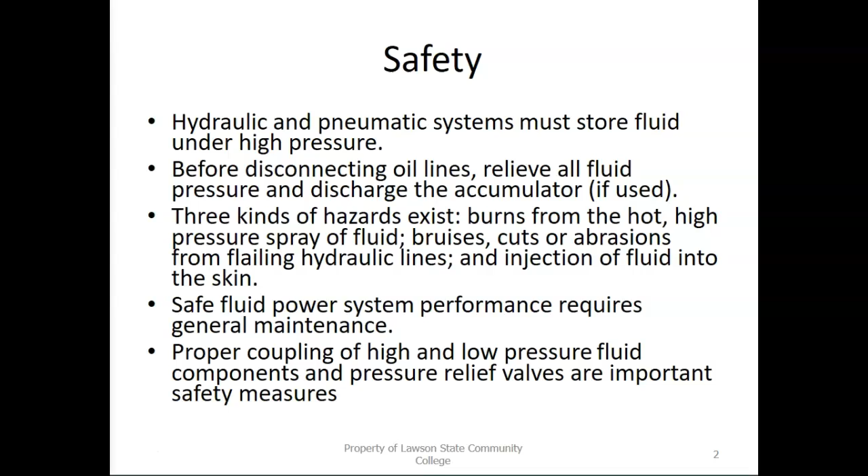So periodically check for leaks and worn hoses. Don't ever do it with your hands and your fingers, because that's asking for trouble. That's going to get you bit by something, right? Think about that for a minute. Yes, you should check for fluid leaks and worn hoses, but you want to make sure you do it properly, and many places have a specific way they wish you would check it.

If it's pneumatic lines, what's the best way to check it? Can't see air, but you can hear it. Soapy water, exactly. Something very simple, it's soapy water. It's the way you check for leaks on a tire, y'all know that, right? If you're ever looking for a leaky tire, you've got a little puncture in your tire, spray soapy water on it, what's it do? It's gonna blow bubbles.

Keep contaminants from hydraulic oil and replace filters periodically. That's what you're supposed to do within your car, right? So why would you treat a pneumatic system at work any different than you do your car? Every X amount of miles or X amount of months, you need to change your filters, because otherwise everything gets gunked up, breaks down, and just...

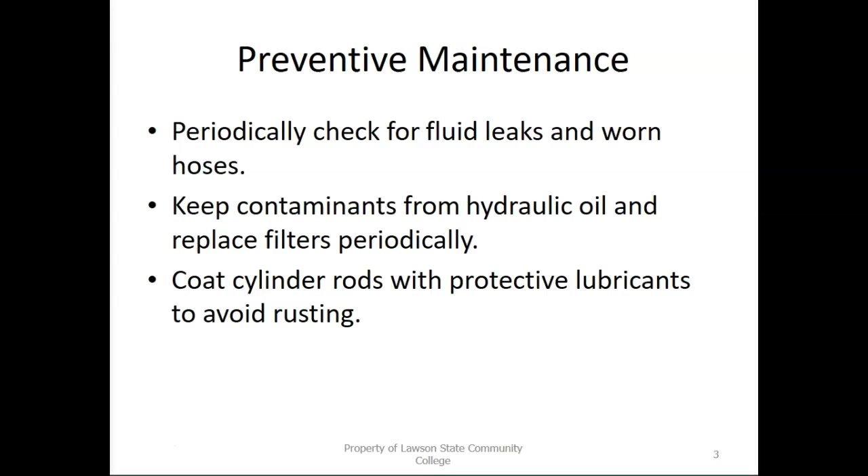So that's why you need to make sure you cut off all lines and depressurize your system before you work on it. Because if you don't, it can mess you up. It can cause a lot of problems.

So fluid power: this is the use of a confined fluid flowing under pressure to transmit power from one place to another. It has no fixed shape and yields easily to external pressure. Liquid and gas are primarily used in industry. Now, when it talks about gas, what is the most common one we use as far as gases go? Do we use specialty or just basic air? We use basic air. Why? Because it's cheap. All you gotta do is have the compressor suck it in, press it down, send it on. And then at the end of the day, what can you do with the rest of that air? We can re-release it into the wild from whence it came, only it's generally cleaner than whenever it went in.

So the main advantage of fluid power over electricity is that actuators can be stalled without damage. If you do that with electricity, you are probably going to burn something up, tear up your motors, something. The actuators can be linear or rotary, but the speed is very simple to control because all you got to do is control the pressure and the speed at which fluid flows into that cylinder.

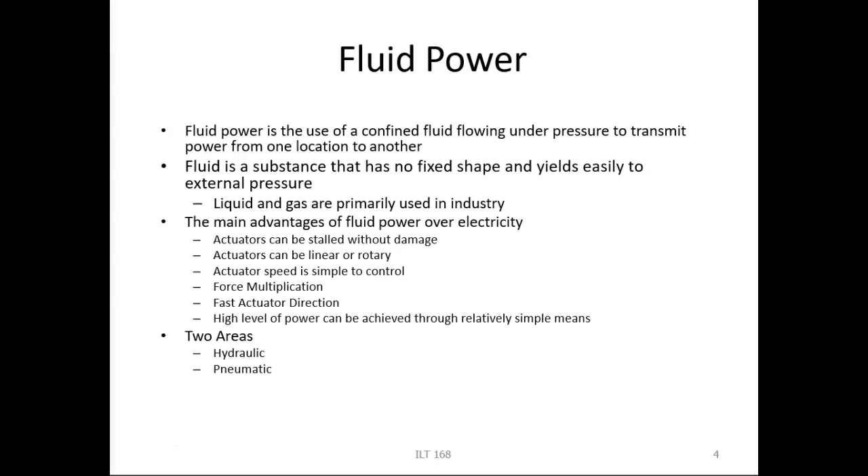So it's easier to produce straight line motions with fluid power. It really is. It can transmit equivalent power to a much smaller space. It's safer. Why is it safer?

This is one of those times I wish I had my home drill, because I've got a nice little power drill, and if you've ever really looked at the motor as you spin that sucker, what does it do? Not just spins, it sparks. Bad thing about electricity is it can throw some sparks out. Why is that unsafe? Well, if you're in a flammable or explosive environment, it may only take a little bit of spark to set it off, that's not something you want to use around that. Or if you're working around fluids that are flammable, not such a good thing to work around.

But it has to do with the motor and the friction of the motor. A lot of motors have what are called brushes inside them. So when they spin, those brushes create the electricity, but they can also create sparks and arcs. That's part of the problem with electricity—when you spin motors and have a little bit too much friction, you can have problems. The other reason is that electricity gets really hot. It can overheat. It's got plenty of problems.

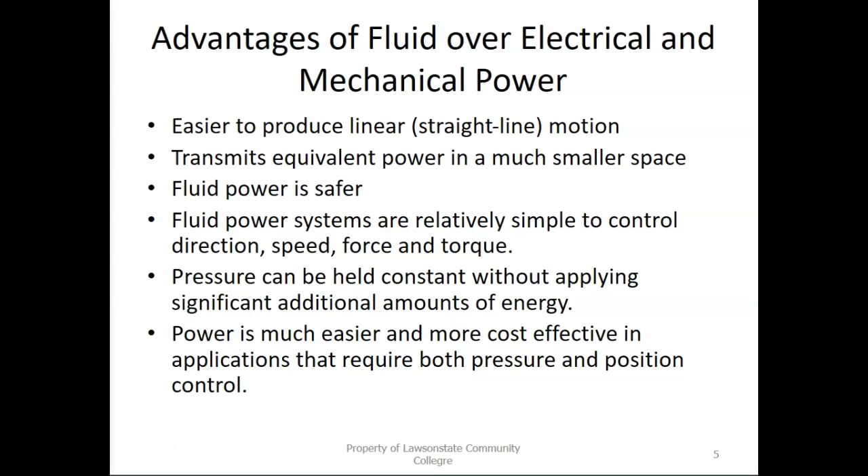So the actuator advantage is that you have a device that converts pressure into motion. You have compact and high energy potential. Like I said, a 1 inch piston with hydraulics does a lot more than you can get out of pneumatics or electricity. They can be stalled for extended periods of time.

Best thing is they are instantly reversible. So if you sit there and go, oh wait, wrong car, and you're already like 3 inches off the ground, you can sit there and drop it back and go get the next car. It takes nothing.

Think about what we were seeing in that video. Not only can it move up, but it can move down, and it does it at a very easy rate without having problems with it. If you start a motor and then switch it from reverse to forward, or forward to reverse, and you keep doing that back and forth, what are you going to do to that motor? You're going to fry it, like a Thanksgiving turkey. Think about that for a minute. But yet with a pneumatic or hydraulic, you can do that endlessly and it never will stop, feel anything, just sit there and go backwards, forwards, and it bothers it not at all.

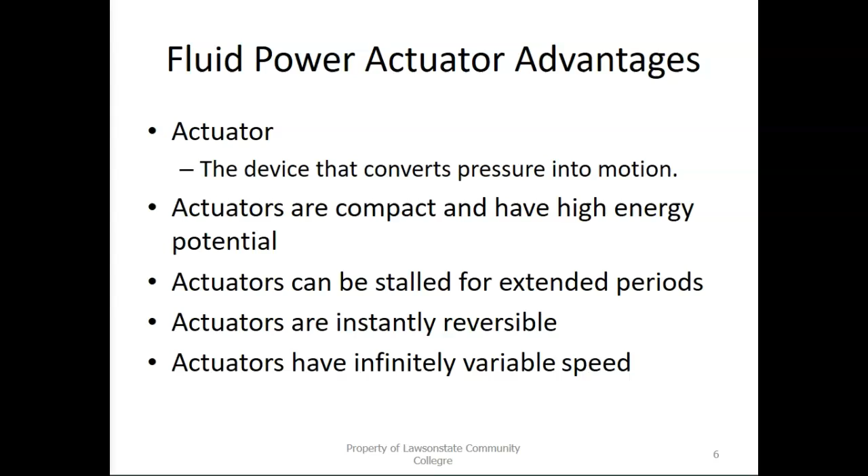They are instantly reversible, infinitely reversible, as long as you are not trying to do both at the same time. And you can vary the speed as long as you are varying either the speed of the pressure fill up or you're varying the ability for it to fill up. We'll get into that later.

And of course, with any industry, you always have the organization of standards. Why do we actually like standards? Anybody know? It means that you get a 3/4 screw with a 3/4 screw no matter who you get it from.

Used to, everything was handmade. If you've ever seen handmade nails, are any two ever completely the same? No. Could they have been? No. Why? Because you are dealing with human error, and there's space for that, but you're also dealing with a process that is not standardized. When you standardize a process, you allow for less variation. But sometimes that less variation is a good thing. It means that if I've got a bolt that is an M16, I can take any M16 ratchet and socket, and I can move that bolt. It doesn't matter who made it, where it's made, how it's made, none of that. I can move that bolt. So while standards are one of those things everybody hates because it means there's no variation.

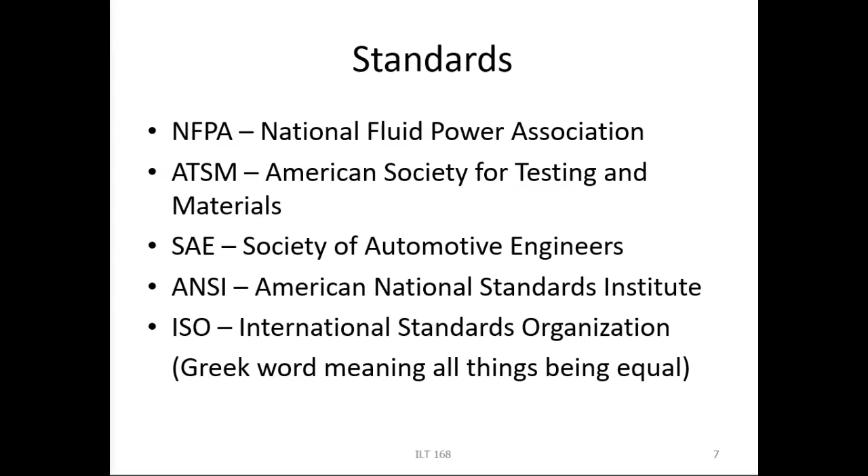So you have the National Fluid Power Association. They just dictate cylinder sizes, mounting styles. Their whole mission is to cooperate with joint industry committees and conferences, where such activities are intended to advance the performance and application of fluid power products by means of better materials, designs, and where practical, standardization. In other words, they're the people that go, oh, innovation—hey, you know what, let's put that into practice. Because sometimes small innovations can lead to larger innovations, right?

You go from something like a piece of leather to these rubber O-rings that are common and very standard with just about everything you buy these days, right? Maybe they might find a better material. One of the ways that they apply most of them now, especially if you're talking about gaskets, is what?

Well, a lot of the gaskets today are done by robots. Why? Well, because of precision—less room for error. They can go back to the same spot within a hair's width. Think about that—a lot better than a human. And it means there are fewer mistakes. Everything is sealed better. That's why engines are so much more efficient today than they've ever been, because we have so many different checks and balances. And a lot of things like that can actually be attributed to fluid power.

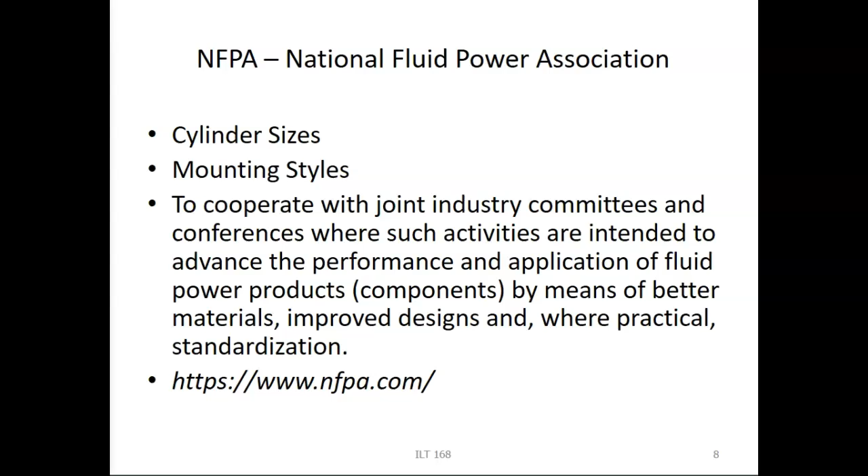So that's the National Fluid Power Association. You have the American Society for Testing and Materials. This is a voluntary standards development organization. So a lot of these people keep coming back to, we're trying to put in standards.

Now, why is the implementation of standards a good thing? It's because you're not talking so much to the individual companies about this as you're talking to the people they work with. So let's say you are in automation, or let's not use your company—let's say you're Rosa, right? So Rosa needs to automate something.

By standardizing what everybody has, it levels the playing field for all companies doing automation. Why? Because no matter who you go to, they have access to the same materials. And that allows for competition between companies. So by standardizing so much of this, it's allowed for more competition in the marketplace. Now I don't have just one company that I can go to automate everything, and then they're the only people I can go to because they're the only ones I can get anything from.

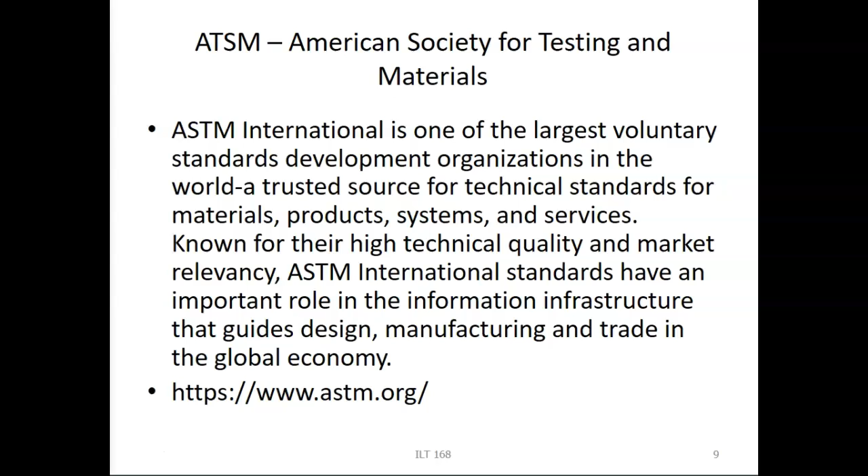The American Society for Testing and Materials is the world trusted source for technical standards for materials, products, systems, and services. So if you prescribe to them, not only is your company good here in America, but worldwide. You can ship whatever you've got to anybody you need to. They have an important role in the information infrastructure that guides design, manufacturing, and trade in the global economy. So they help keep the global economy rolling, I guess you could say.

The Society of Automotive Engineers has 7,000 committee members that maintain 8,300 technical standards and related documents. So them maintaining something says what? Are standards stagnant? No, they're not. Standards are not stagnant. Standards constantly change and evolve.

So if you go back to what they were talking about, how leather was one of the initial things they used as a sealant. Well, if that's the standard for 50 years, and somebody comes along and says, oh wait, I cut this piece of rubber and it works better, the standards organization can sit there and do some testing, do this, that, and another. You know what? This actually is a better material. Leather is no more, let's go strictly with this piece of rubber. That's what happens every day, all day.

And so the largest developer of technical standards for land, sea, air, and space, everybody is served by these people.

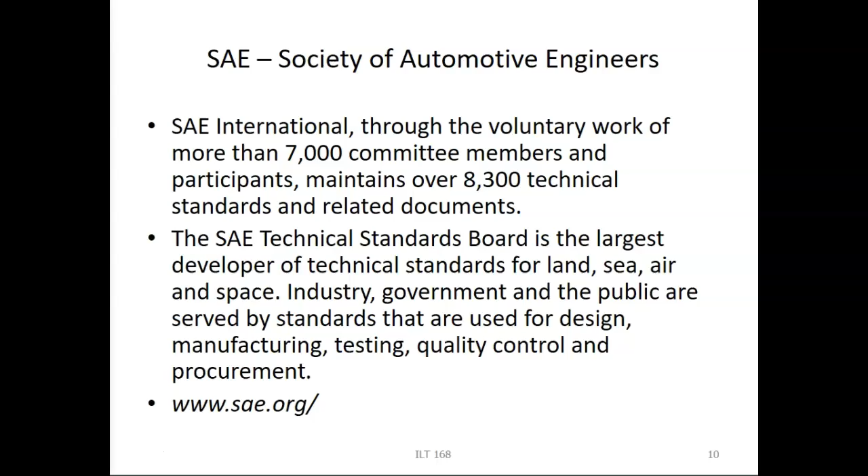ANSI is the American National Standards Institute, and they have their fingers in a lot of pies too, because if you've ever taken robotics, they're mentioned there too, right? This is a private nonprofit organization that administers and coordinates the U.S. Voluntary Standardization and Conformity Assessment System. Notice that it says the voluntary standardization. Why is standardization something that would be voluntary?

Because some people actually still prefer handmade nails. However, that means that if the company that handmade your nails goes out of business, you're going to have a hard time finding somebody that can replace that nail if it gets broken. Just going to point that out. So there is good and bad things about standardization. If you go with not standardizing, you do have things that become more unique, however it means it's a lot harder to repair at the end.

Look at something like a Tesla. Yeah, I'm going to bring them into this. Tesla is the only company that's putting out these smart electric vehicles, right? It is unique, mainly onto Tesla. So what would be the problem with that? They're the only ones fixing them and have parts for them. Can I go to Advance Auto and get any parts for a Tesla? No.

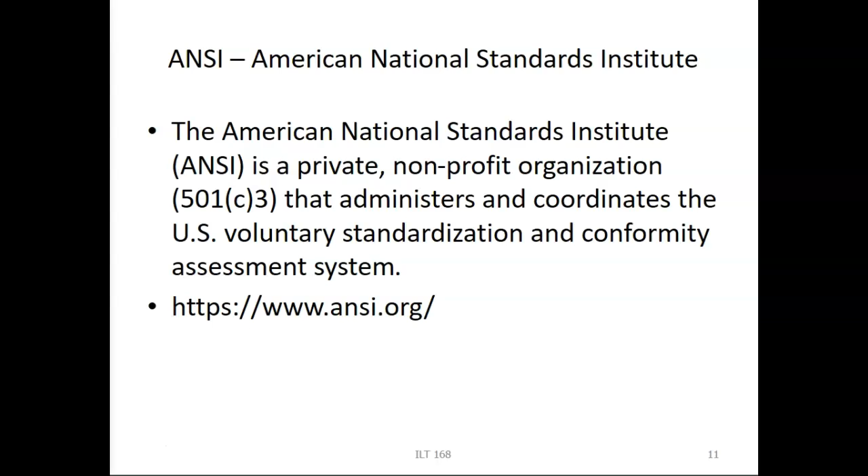So it's voluntary standardization, but if you jump off the beaten path, you're kind of on your own. That is, in and of itself, its own self.

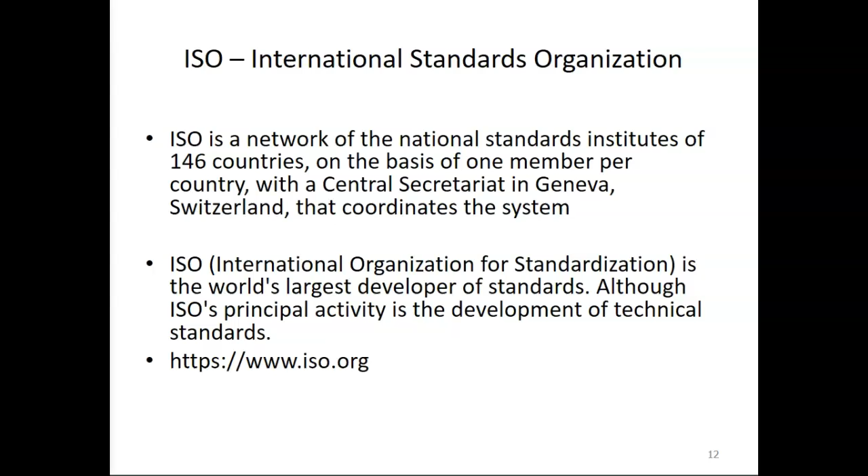ISO is the International Standards Organization, and I think they'll be the last ones, then I'll let y'all go for the day. ISO is a network of national standards institutes of 146 countries on the basis of one member per country, with a central secretariat in Geneva, Switzerland that coordinates the system. These are the world's largest developer of standards, although ISO's principal activity is the development of technical standards. So, just some people to know.